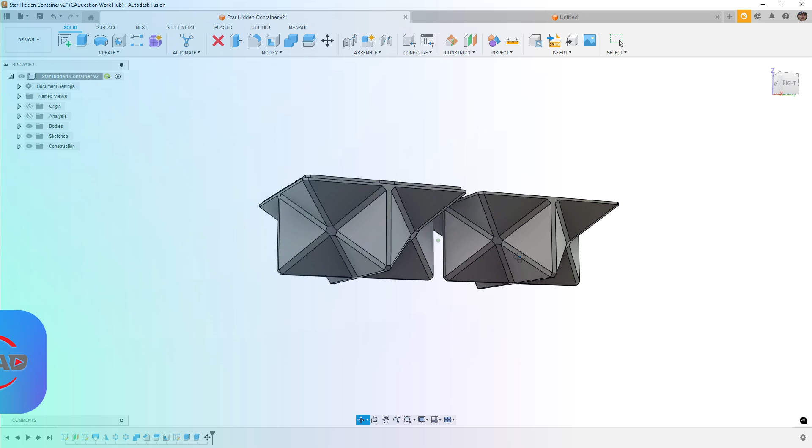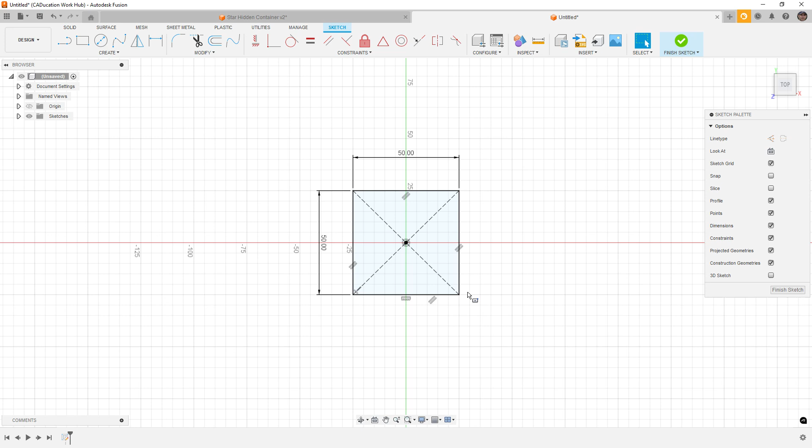So to get started, pretty simple. We're going to begin with a sketch on the top plane. We're going to use a center point rectangle, so R on the keyboard, and we're going to make it 50 by 50 millimeters. If you want to make yours bigger or smaller, this would be a good time to do it. You can also scale it up or down in your print slicer.

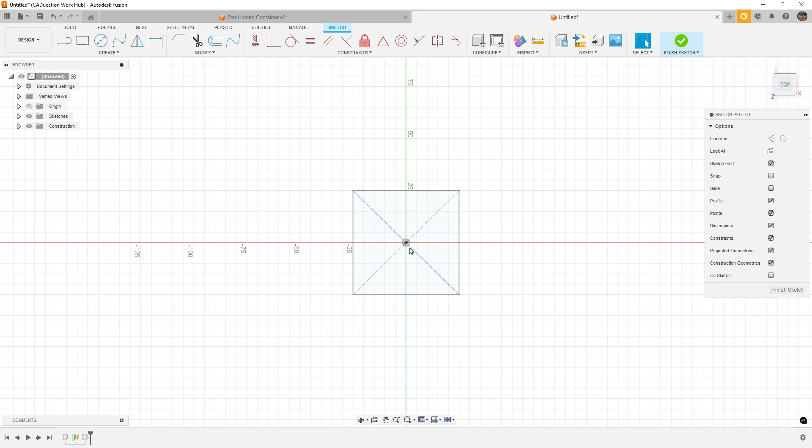Next, we're going to use an offset plane, and I'm going to do this 25 millimeters. So we're going to have a total of 50 by 50 for the overall size, but this way we've got a new sketch plane. We can create a sketch, and I'm going to project the center point, just P on the keyboard, and finish the sketch.

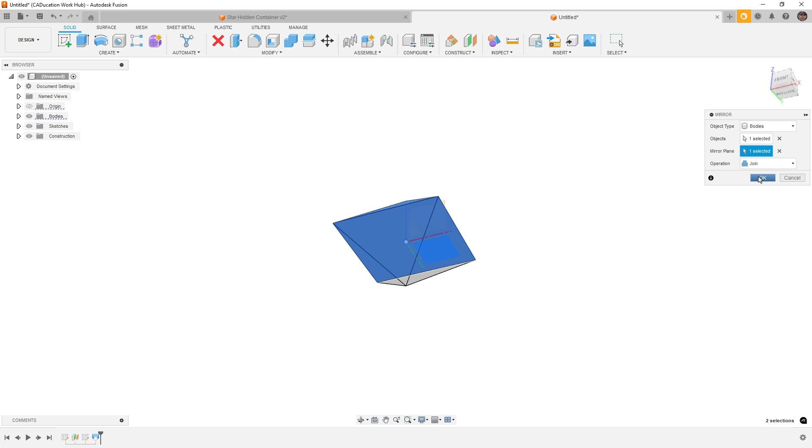Now we're going to select loft. We're going to loft from here to this point. We'll say OK. And then we're going to create a mirror. So we're going to mirror this body across either the top plane or its own section there. And this is our starting point. Now, it may not look like much, but it's pretty simple.

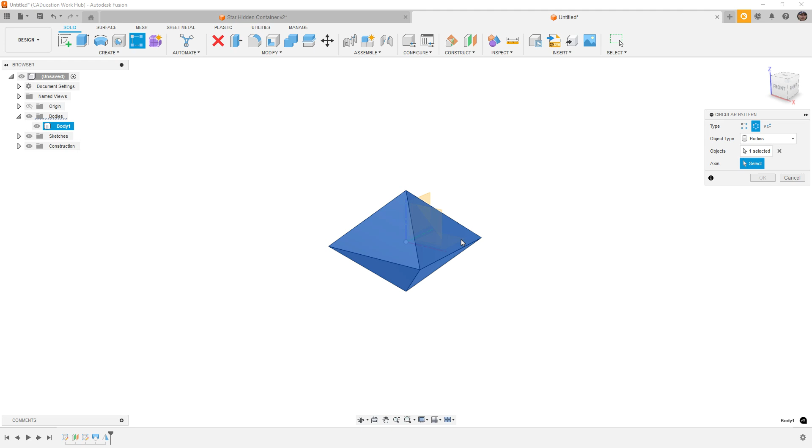We're going to select body, and we can either do a move copy or rectangular pattern or circular pattern. So whichever one you want to do, I'm going to select the pattern option, select circular pattern. And for my axis, I'm going to select the x-axis. We're going to do two objects, and we're going to do a partial. We're going to go 90 degrees.

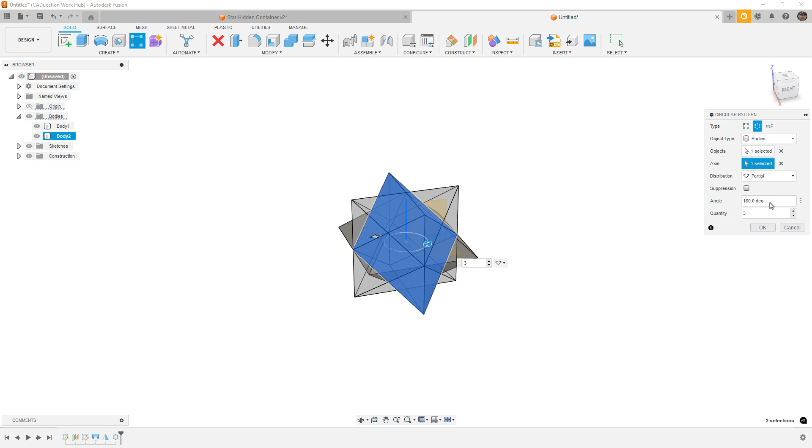Now we want to take that copied object, and we're going to do another pattern, once again circular, this time about the vertical axis. Again, we're going to do partial, 90 degrees, two instances, and say OK. That is it. That is the whole shape. So we're going to select all of them and combine them together. So pick one and then select the other two to join them all together.

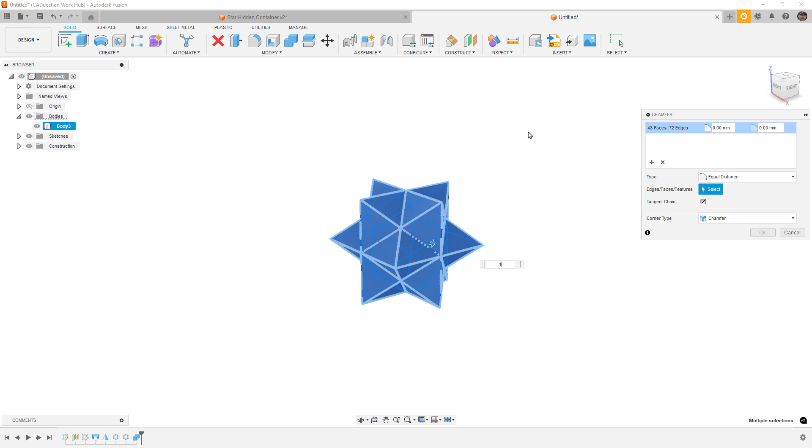We're going to do a chamfer. So box select and do a 1 millimeter chamfer. And when you're printing this, you do want to make sure that you think about using something like a brim for extra support. In most cases, if you're printing it slow enough, it'll be fine. But if you are running it fast, like I am on my printer, then it can tend to knock it off that build plate.

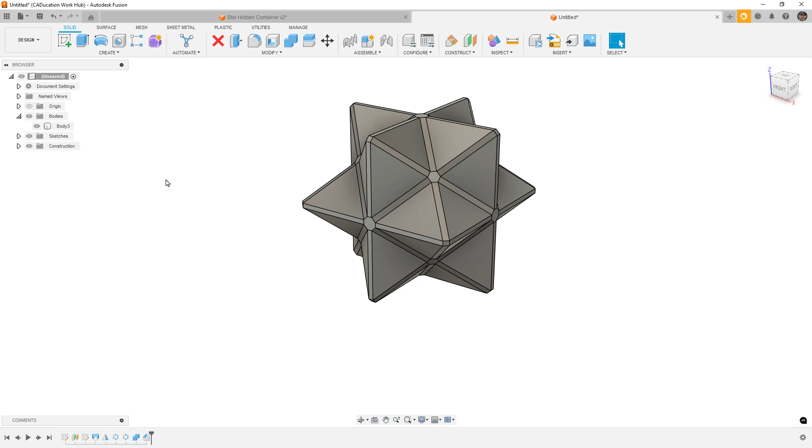So now that we've got this as a solid object, what we're going to do is select split body. I'm going to split the body using the top plane. So hold down the left mouse button, say OK. And I'm going to hide this body and rename it top.

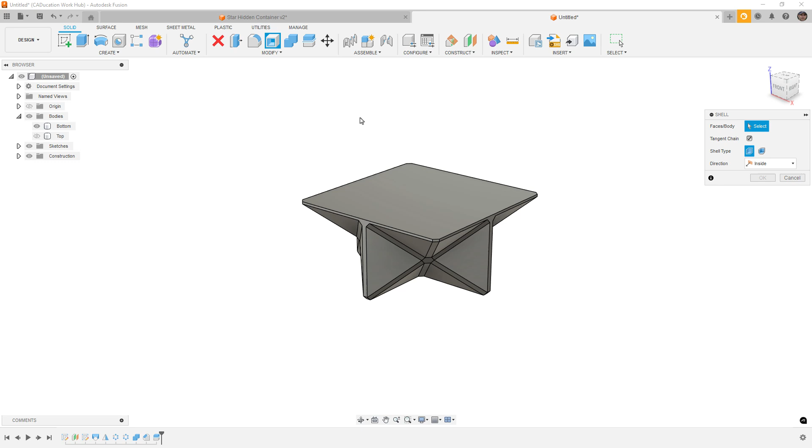And we're going to rename body 3 as bottom. Next, we're going to do a shell. I'm going to do this independently on both. So I'm going to make it 2 millimeters thick. You could do this at the same time if you wanted to, but oftentimes it's just easier to separate them and just do them one at a time, 2 millimeters.

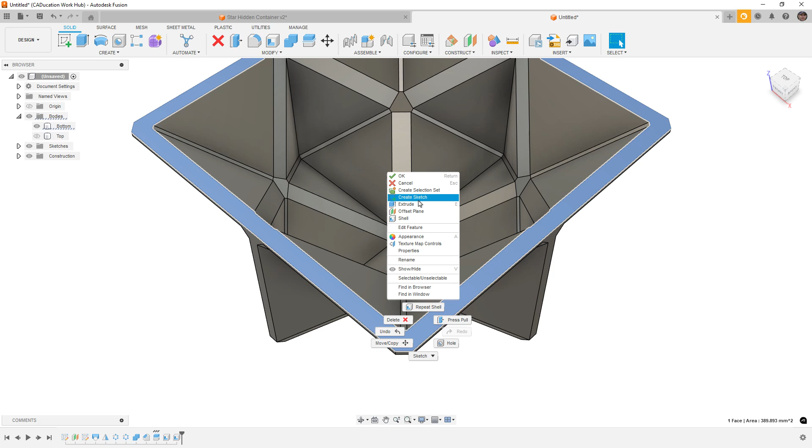And next, we want to go back to the bottom. We're going to create a sketch on this face, and we're going to use offset. So offset the inside section here out a distance of 1 millimeter. So that'll be -1. And finish. Then we're going to extrude this little inside lip up 1 millimeter, hit enter.

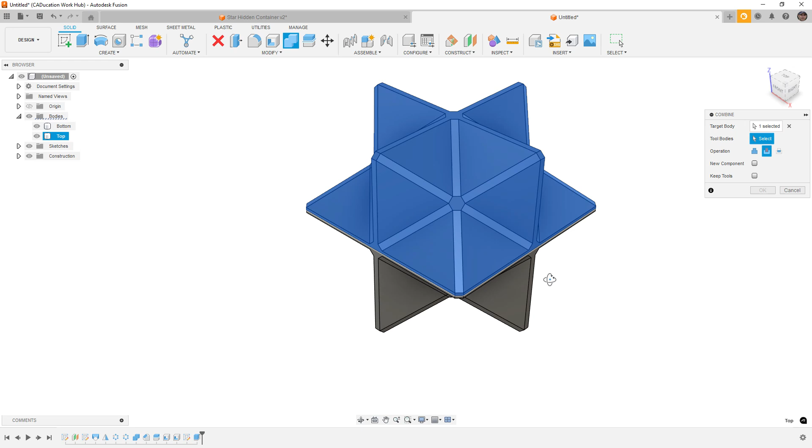Then we're going to bring back the top. We're going to select combine, but we're going to use the cut option. So select the top body as our target. Select the bottom body as the tool, but make sure we keep tools, and we'll say OK. And that's pretty much it. If we go to do a section analysis, just pick one of these planes. I'm going to flip it the other direction.

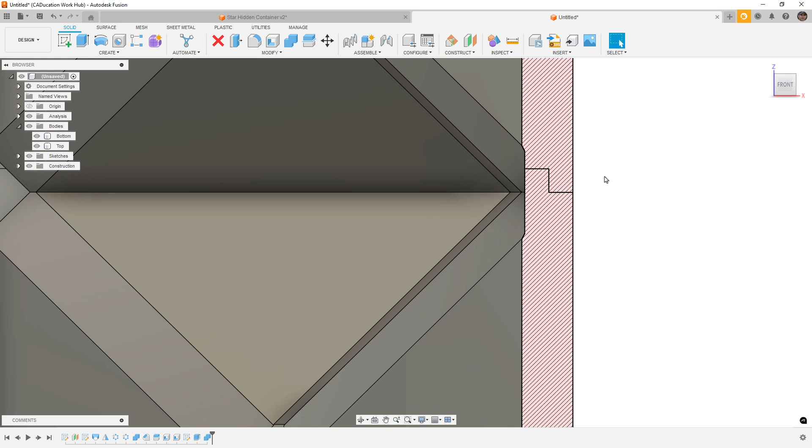Basically what we've done is we've added the lip to the bottom, and we've cut that exact lip away from the top. Now, in most cases, when you're designing parts like this, you want to have a little bit of a gap. But what I found with a design like this is if you make them exactly the same size, they tend to snap together really well. It actually catches on the layer lines a little bit, and it holds together really nicely. So I keep them exactly equal. I don't have any offset.

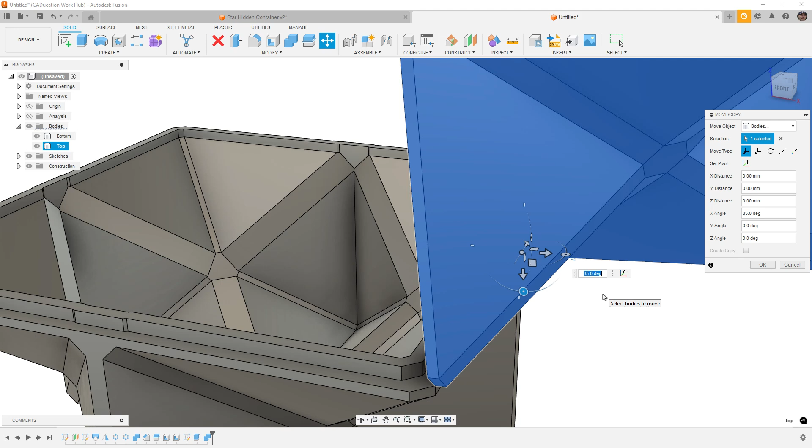The last thing that we want to do is either export each one individually, or we could take the top one and use move, M on the keyboard, reset our pivot point to the middle of this edge, and then we would rotate it 180 degrees, and then we would just simply pull it away a couple of millimeters. At this point, all we need to do is export it to our slicer.

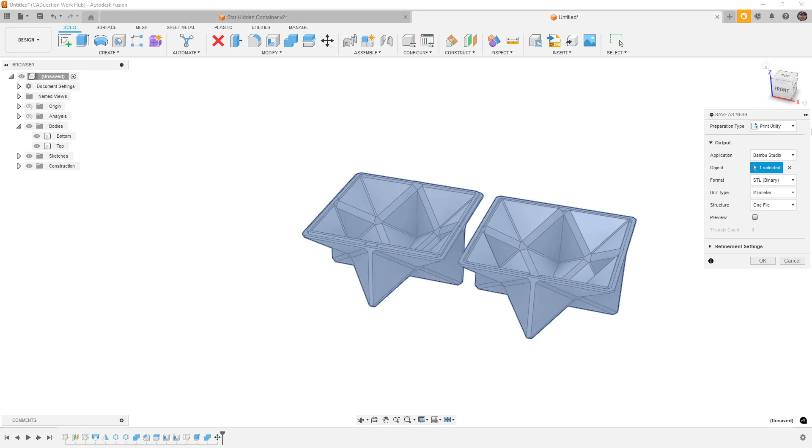Now, in a previous video, we talked about how the update to Fusion messed up our slicer export. They've actually fixed it, which I'm really happy about. So if you do save as mesh, it will remember to go to the print utility if you've already done that. For me, I'm using Bambu Studio right now with my P1S, and I'm using basically all the default settings with the exception of adding Brim. I found that I did need to add Brim to ensure that it stays adhered to the base plate.

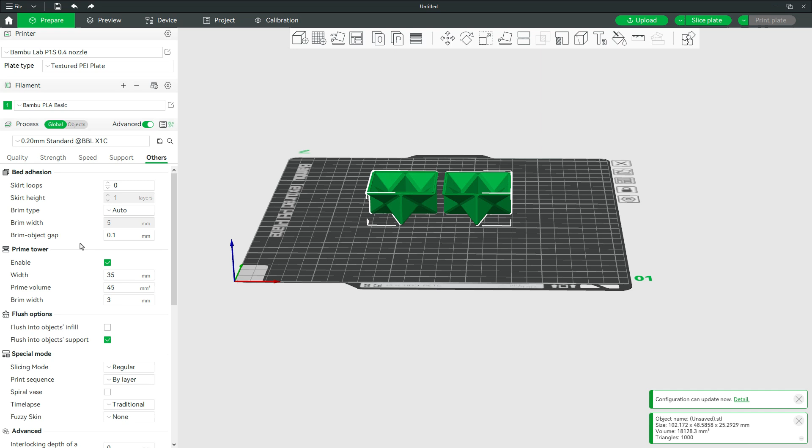So if I zoom this in, and I take a look at my slice settings under support, actually under other, we want to make sure that the brim type is set to outer brim and slice it. So this just adds a little bit of extra support at the base there, slight overlap here, and everything prints without really needing too much extra attention. There's no supports needed, so the outside of this looks great.

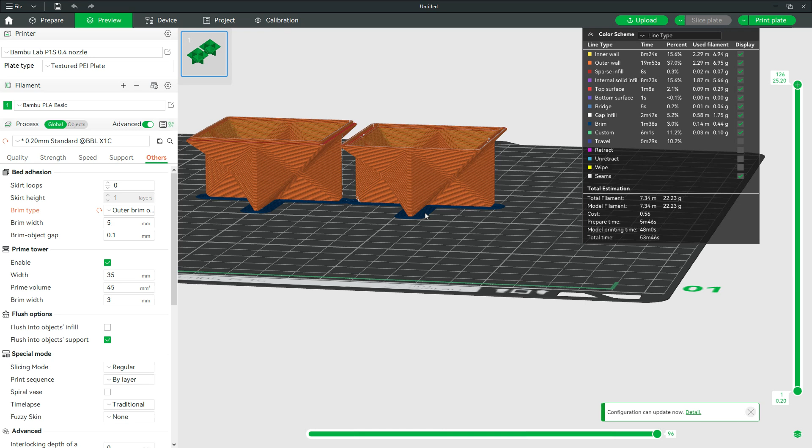The inside does as well based on all the angles of everything, and I've printed probably a dozen of these things at this point. Based on your settings, it will print in about 45 minutes. If you run it faster, you can get it obviously sooner. If you make them bigger or smaller, obviously that has an impact. But this is a nice way to make just a small little trinket that you can put in, say, a stocking and just hide some little candy or something inside of it just as an extra little treat.

I have printed a couple of these things solid without actually splitting it apart. So you can also toss in some decoys, ones that don't have anything inside them as well. So just a fun little thing to play around with on the holidays.